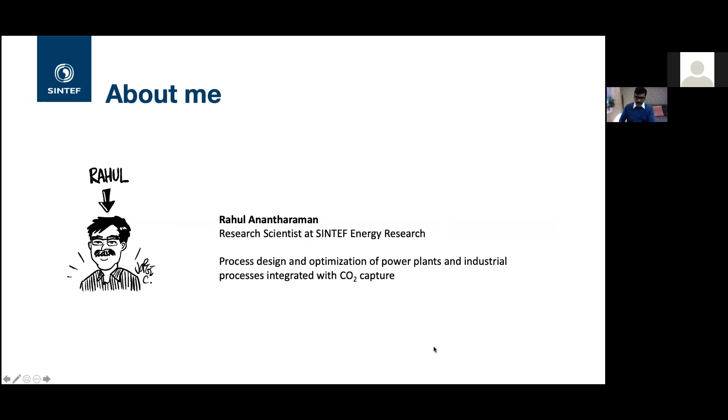I'm Rahul Anantharaman. As I said, I'm from SINTEF Energy Research, and for the 1 hour today, it is a very broad topic that we have. So I'm going to start off by presenting my organization to you. I'm not sure if you know that. So just a very quick presentation of the organization where I work at. And then start with where do the CO2 emissions we are talking about come from?

What is the role of CCUS in a net zero scenario? I'm taking the idea of clean energy to mean a net zero scenario. That is, we don't emit any net CO2 as a society, which the energy system is a very big part of, but it is not limited to the energy system itself. Then talk a little bit about CO2 capture,

and give an example of that in hydrogen production, the role of CCS in hydrogen production and the future energy system scenario. What is the role of CO2 utilization, carbon dioxide removal technologies, with a specific mention on waste to energy with CCS, and summarize the talk. So like I mentioned, it's a broad topic, so I've gone very high level with it. So I'm not going into details.

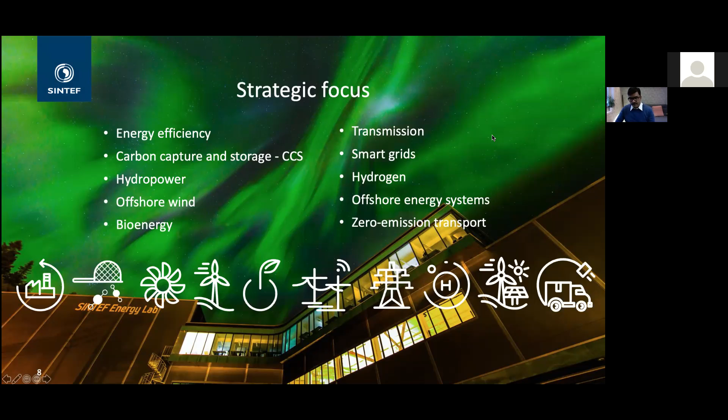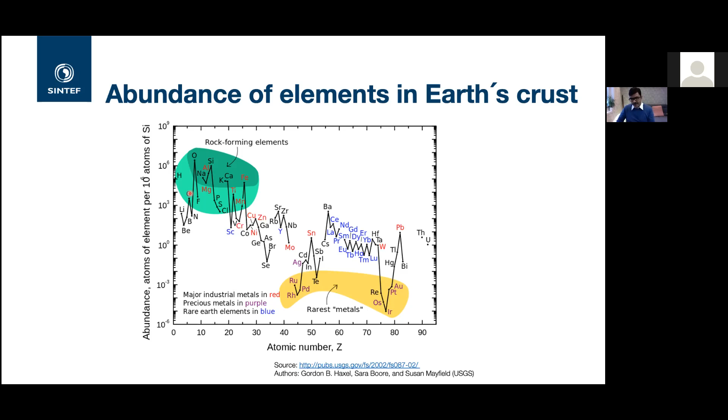But of course, that is not the major one. Where the majority of the CO2 comes from is the use of fuels. And fuels tend to have carbon in them, except hydrogen. Most other fuels or all other fuels have carbon in them, and burning them emits CO2. And that is where most of the CO2 comes from, burning of fuels for energy, either in industry or other residential purposes, or for transportation, etc. And that's where the CO2 comes from.

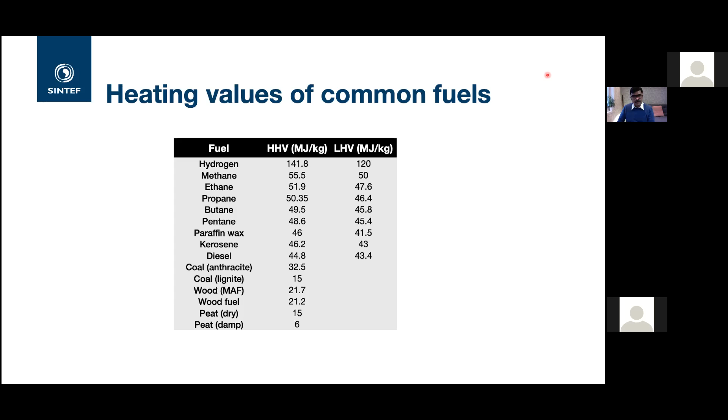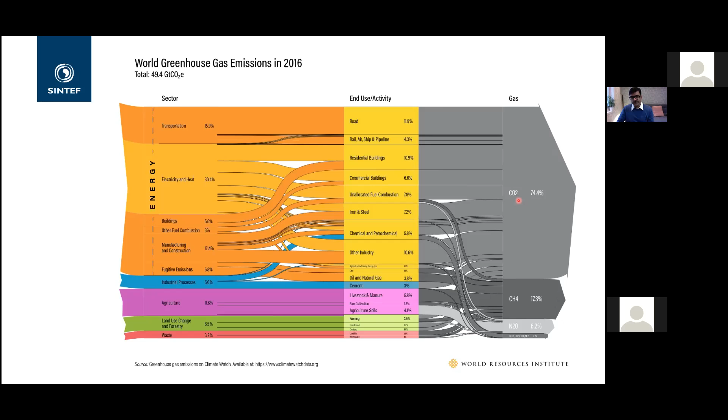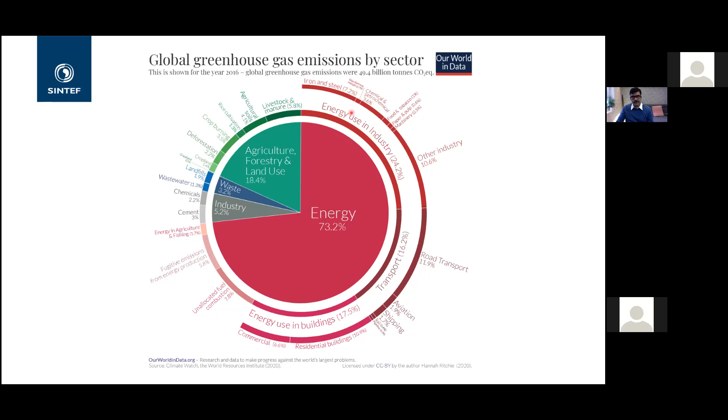The industrial emissions that we talk about, like I said, for cement is approximately only 3%, even though there is also a fuel use in the cement industry, which comes as part of this here. So, to summarize, we could say that CO2 emissions from energy use is primarily from the carbon in the fuel. And there is also other amounts of CO2 emissions as a byproduct of chemical reactions needed in the production process.

The most simple example is clinker production, but both ferrous and non-ferrous metal productions use carbon as a reducing agent. And when you use carbon as a reducing agent to produce the metal, you end up releasing the carbon as CO2. And that is a source of a lot of CO2 emissions, particularly in iron and steel. And here in Norway, we have a lot of non-ferrous metal production like manganese and silicon, and also aluminum, actually. There is a lot of CO2 emissions that are associated with that because of the use of carbon as a reducing agent.

And of course, there is the case of hydrogen, ammonia, or methanol, where you convert your natural gas to hydrogen and CO2, and then separate out the CO2. So these are all the sources of CO2 which are not directly from using a fuel, but through production processes for metals and other items that we use every day.

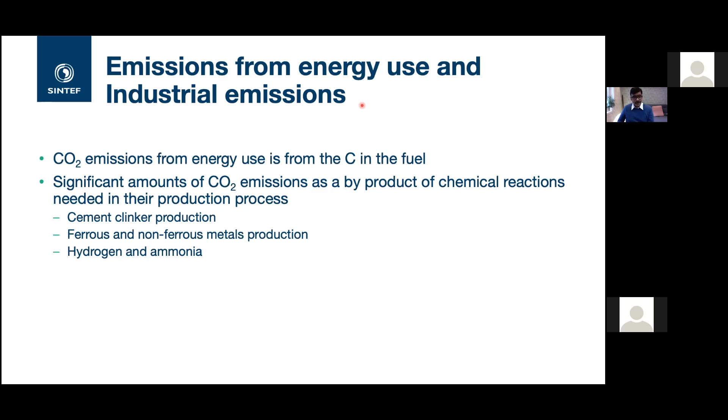So I'll directly jump into the topic and present what is the role of CCUS in a net zero scenario, and then talk a little bit more about the details, because the idea is to present what it means first. So there have been many studies looking at energy systems. So you do energy systems modeling, either country-wise, region-wise, or even continent-wise. We do quite a lot of studies in Europe.

And the output from these models depends quite a bit on the inputs you provide to it, as with everything. But the problem is these are such high-level models that you tend to provide very simplified assumptions to them. And there are a lot of biases when you do this modeling, depending on who's doing the modeling. So an example is, if you go to the website shown here, they have a collection of 56 peer-reviewed papers, which tend to show that you can have a clean energy system which is 100% renewables.

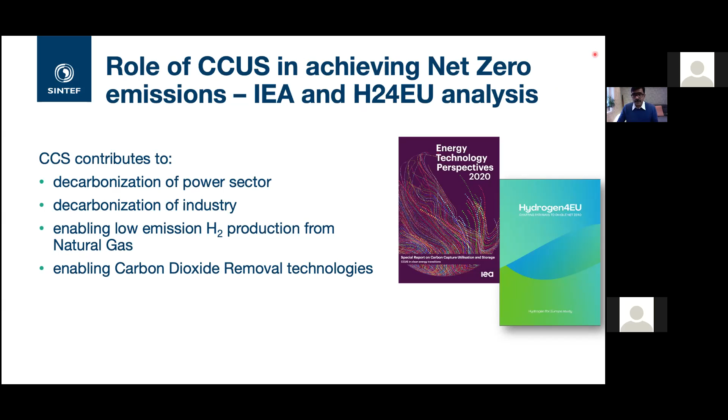I don't see I have any questions so far. Please let me know in case you have any questions and want to ask me to stop.

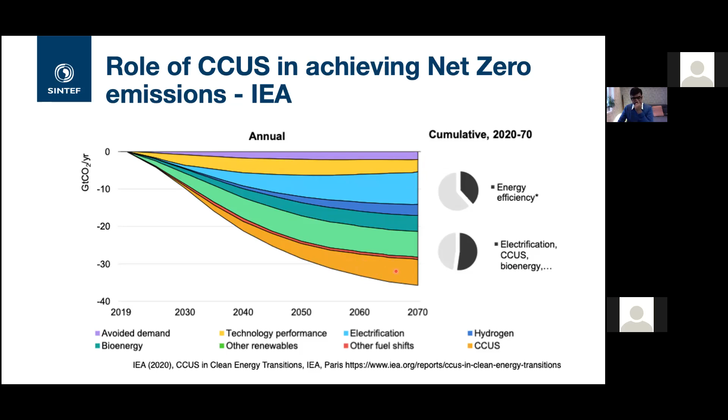So according to the IEA, I'll focus on the IEA report because it is a much more renowned organization and everyone knows about it and tends to follow what they say. So according to the IEA report, CCUS has a significant role to play, as you can see in the cumulative amount of CO2 emissions that are reduced by CCUS. And most of this, you see, comes from capture from coal, which they see increasing in 2050 and then reducing by 2070, but also natural gas.

And this increase in natural gas is both power plants and natural gas conversion to hydrogen. And there is significant CO2 being captured from biomass combustion. And again, most of this is biomass combustion to produce electricity.

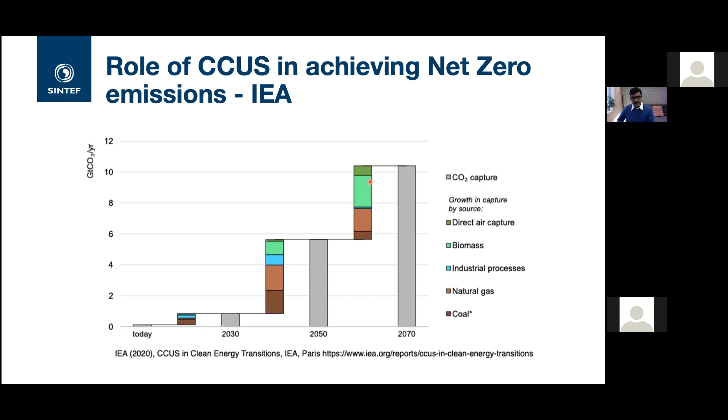Initially, by the year 2050, there will be a lot more CO2 captured from industry according to their analysis, after which time they see it being electrified, so less CO2 emissions from fuels from the industry, so less capture required from the industry. But then you have a little bit starting in 2050, but quite a bit of it in 2070: you capture CO2 directly from the air, or you remove CO2 from the air. And that, again, I'll talk a little bit about later in this talk. So we've seen that CCUS has a role to play.

So let me give you a very quick overview of what CCS is. So basically CCS is the fact that you have CO2 in a source and what you're trying to do is to remove the CO2 from the source. So you're capturing that CO2. When you use fuels, the CO2 comes from burning the fuels. So in the case of power plants or combustion processes, there are three main routes to capture your CO2.

The first, most common route is called post-combustion or end-of-pipe capture, where you have your fuel combustion or chemical process conversion, as the case may be, and you get a stream primarily of CO2 and nitrogen, which you then separate out. And this CO2 then goes to CO2 compression or liquefaction, depending on the transport that you're using, and then goes to storage or utilization. And the main separation here is between nitrogen and carbon dioxide. And the most mature technology is absorption using amine-based solvents, and this is applicable to both new and existing plants.

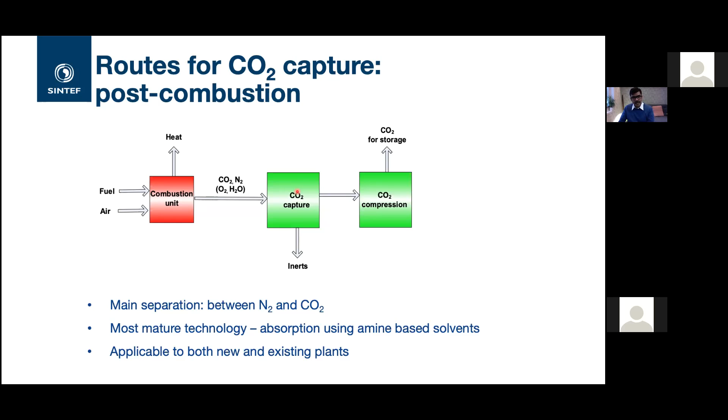And this is the most common form of CO2 capture that we talk about. So typically industry uses this, power plants tend to use this. So this is the most common form. When we say CO2 capture, this is what we think of.

Another route is oxy-fuel combustion. Here, rather than burning the fuel in air, which is where the nitrogen comes from, you burn it in oxygen so that you get rid of the nitrogen. And then theoretically, you will only have CO2 and water as products from your combustion, because the C and H in the fuel will combine to form CO2 and H2O. So then it is easy to separate out, just condense out the water and you get the CO2 in theory. But that is not the case. So the process is a bit more complicated.

Why? Firstly, burning something in pure oxygen is very difficult. It results in very high temperature. So what you need to do is recycle some of your CO2, or quite a lot of it, back as a sort of temperature control.

This reduces NOx formation, etc. Also, you don't get 100% pure oxygen, so what you end up having is a little bit of nitrogen, a little bit of argon, etc.

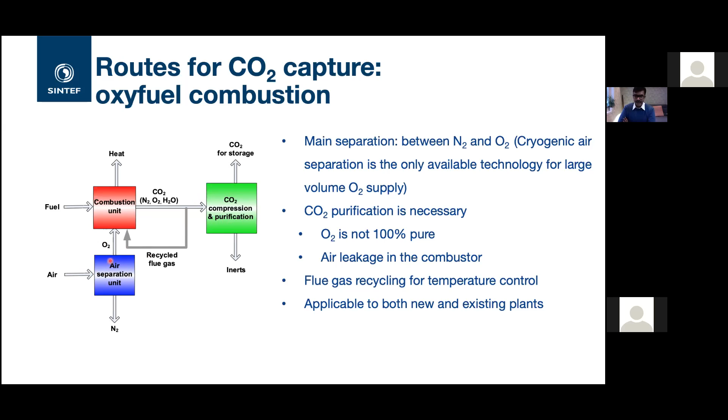The last route we can talk about is pre-combustion. As the name suggests, what we are doing is capturing the CO2 before you combust it. And how do we do that? Either the fuel, natural gas or coal or whatever the fuel is, or biomass.

You can either gasify it or reform it and convert it to syngas, which is a combination of CO, CO2, and hydrogen. To ensure you separate all of the CO2, you go through a water gas shift, where most of the CO is then converted to CO2, and you end up having mainly CO2 and hydrogen.

Here you capture the CO2, and then you burn the hydrogen, either in a furnace or whatever the application is, even in a gas turbine. So this is where you are actually capturing the CO2 before the combustion process. So it's called pre-combustion.

So here the main separation happens between CO2 and H2. There is also the air separation that takes place, but it's a small part compared to the larger part, which is the CO2 hydrogen separation.

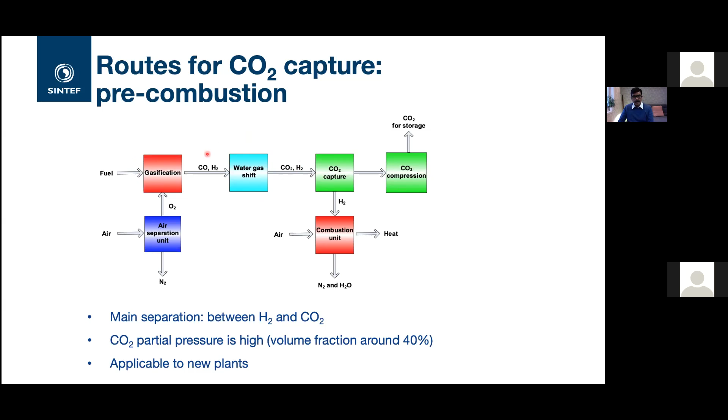So we've been talking about these separation techniques. So what do we use for CO2 separation? The most common one is sorption-based separation. It can either be absorption, with a B as in boy, or adsorption, with a D as in dad.

In the case of absorption, what you have is a liquid that flows typically countercurrent to your gas containing the CO2 that you want to remove. They are contacted with each other in a unit, and CO2 is captured.

This solvent which captures the CO2, your absorbent here with a B, then goes to a regeneration unit. The regeneration unit is where you supply energy, so that you separate your CO2 from your solvent. Then the solvent is regenerated, CO2 separated, and you send your solvent back. This is an absorption process.

In the case of adsorption with a D, as in dad, here what you do is you have solid particles rather than liquid, and it's typically a surface phenomenon. It's not only physical adsorption, but sometimes also chemical adsorption, but it can be either of them, and follows a similar process.

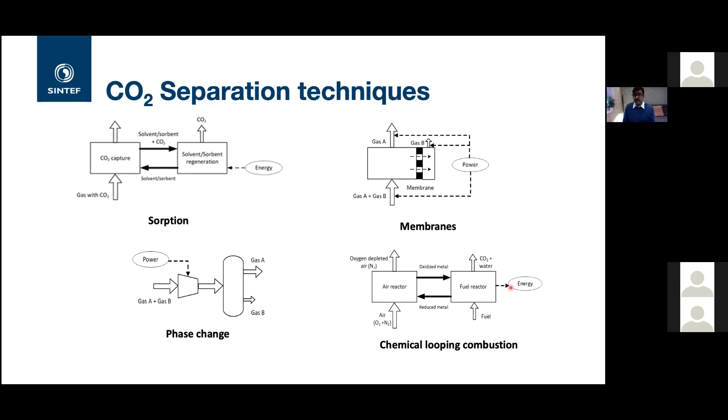So I'm giving you an overview. I could spend - I've taught courses on these capture technologies for a couple of days - so we won't go into the details here, but in case you want to know anything in detail about these capture technologies, please let me know. So I talked about the different capture technologies, but they are at different stages of development.

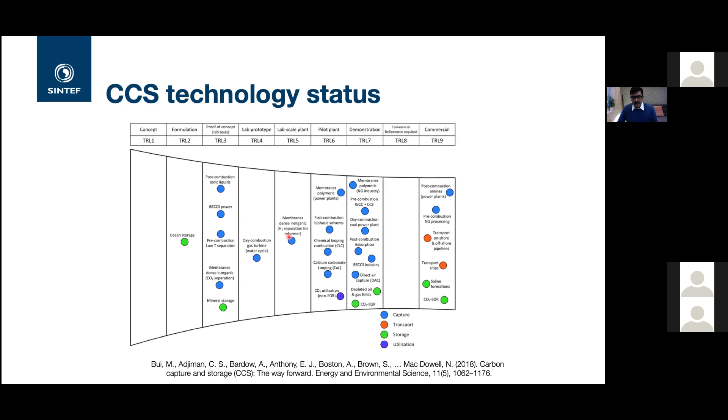So how will you select a capture technology?

Of course, it depends on the CO2 partial pressure. What do I mean by that? It's a combination of the CO2 concentration in the flue gas and the pressure at which it is available. For instance, the cement industry has approximately 20% CO2 available at 1 bar.

So the partial pressure is 0.2 bar, because 0.2 multiplied by 1 equals 0.2. In the case of hydrogen production from natural gas, the syngas is at say 20 bar, with approximately 30-40% CO2. So that's 0.4 times 20, which is 8.

So there are large differences in the partial pressure. Higher the partial pressure, easier it is to separate, and you use options which are pressure based, or even liquefaction. At lower partial pressures, you would use absorption or temperature swing, because it has to react to separate rather than use pressure as a driving force.

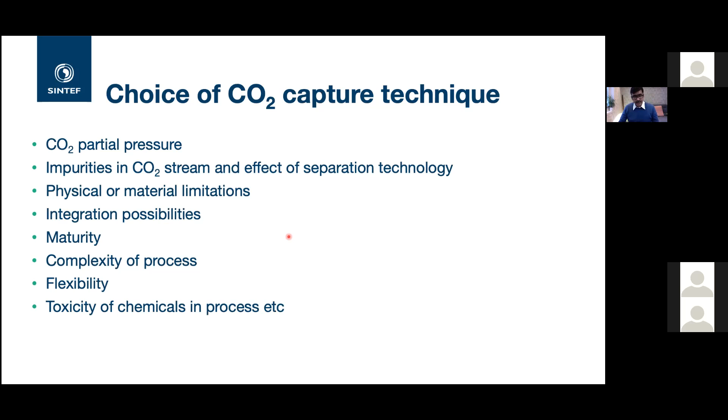Aluminium production has really low CO2 concentration because the CO2 comes from an electrolytic process where Al2O3, or bauxite, is reduced to aluminium using a carbon anode. This process generates so much heat that they use air to drive out and cool the CO2, so it's diluted by air to approximately 1% CO2 at atmospheric conditions, making it very difficult to capture.

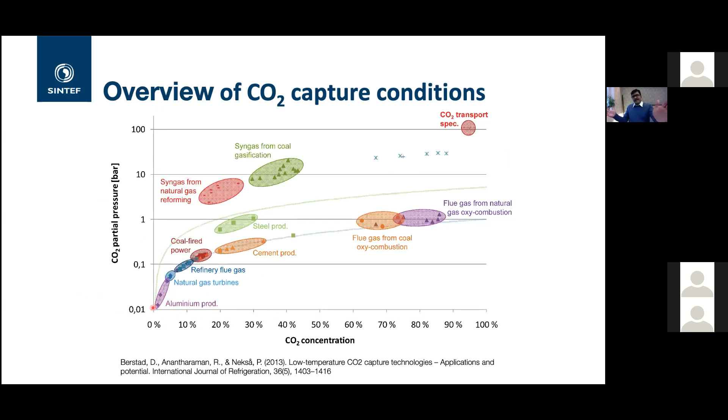Of course, there is no getting away from it - we still need to capture CO2 from a natural gas combined cycle power plant, so we need to still develop technologies there. But we must keep in mind that this is going to be way more expensive.

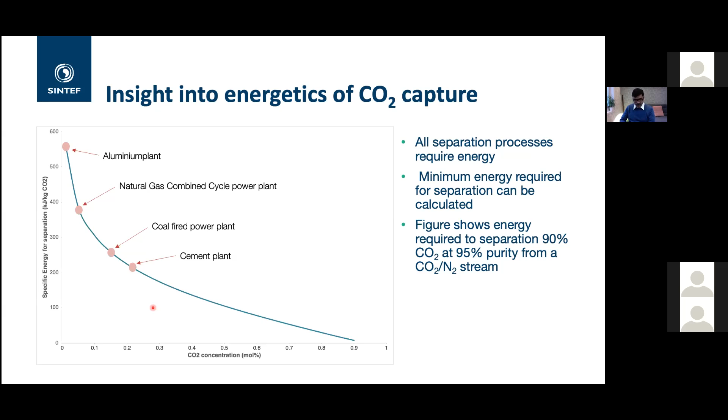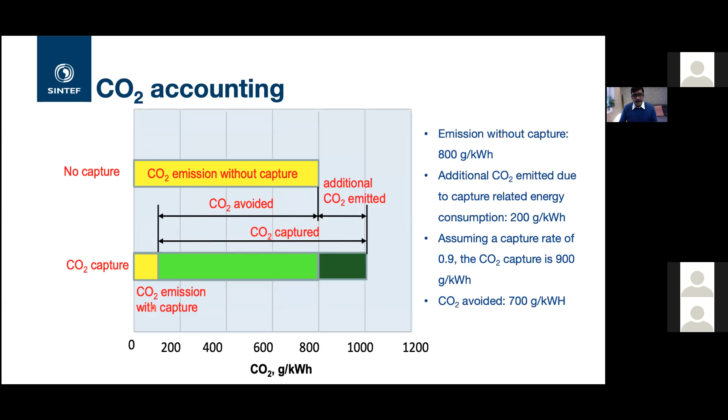I noticed that I have talked quite a bit and I'm way behind on my schedule.

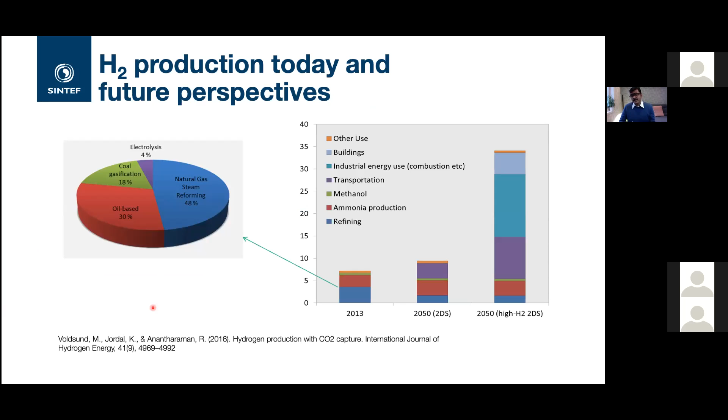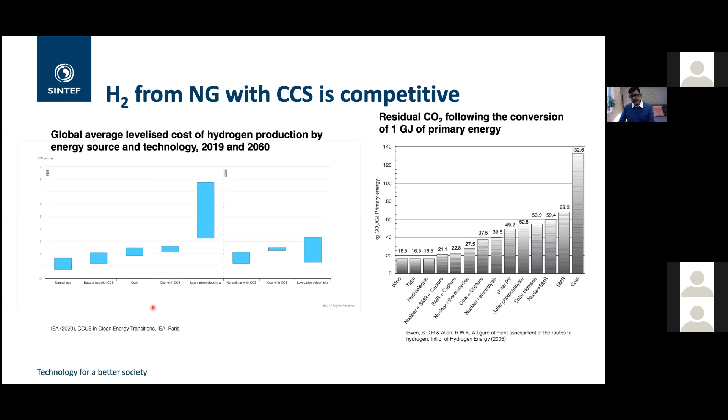So what I'll do is I'll skip through the hydrogen as a clean energy vector. Suffice to say that hydrogen is very important in the future as we see it. As the world is seeing it now, we are going through a hydrogen boom - everyone is talking about hydrogen. And hydrogen from natural gas with CCS is the best way to provide hydrogen as we know it today. Even the cost seems to show that that is the best way forward.

So there is also the topic of CO2 utilization, because the topic said CCUS. We ourselves don't work quite a bit in utilization - we focus primarily on capture and storage because that's the best way to get rid of the CO2. But there is a value for utilization, a small value, and there are three different routes to do this.

Overall, first is mineral carbonation, where the CO2 can be reacted with minerals or waste streams. So it can be rocks, mineral rocks, or waste such as iron slag, or even waste-to-energy plants have fly ash that can be used to actually react with the CO2 to form carbonates. And these carbonates can be used in the construction industry and for long-term storage. So there is a value for it. It doesn't pay much, but it is very easy to do, low energy requirement.

Next in energy requirement is conversion. So this goes along with this whole circular economy, where you capture your CO2 and then you convert it back into useful chemicals, like polymers that are used in a wide variety of industry. The idea is that you're now replacing fossil carbon and rather using carbon that you have captured instead. But the energy requirement depends on the process pathway and the particular chemical that you're looking to convert to.

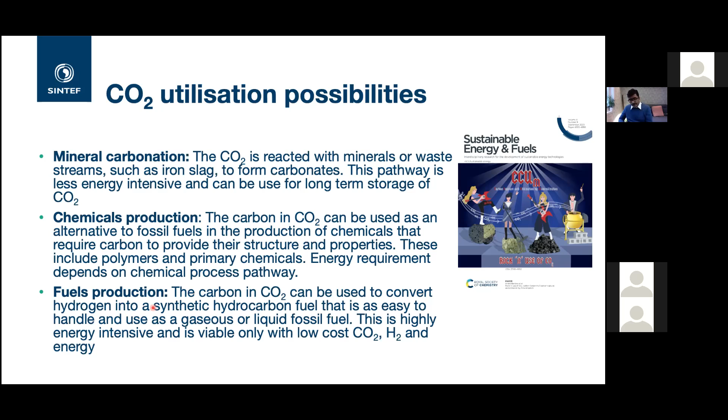The most energy intensive of these is fuel production. There has been lots of talk about capturing CO2 from the air and also producing hydrogen from renewables, combining these to produce fuels, either methane again or methanol, etc. But this is not a viable option unless you get really low-cost CO2, hydrogen, and energy. Basically, most of these cases assume free energy and very cheap CO2 and hydrogen, which is typically not the case.

So we've done a study, again, back to cement. We've done a study for the cement case a few years ago as part of a project that we were leading. And one thing is very clear, and this has come up again and again from everyone who does these studies: you must look at it from the overall lifetime perspective.

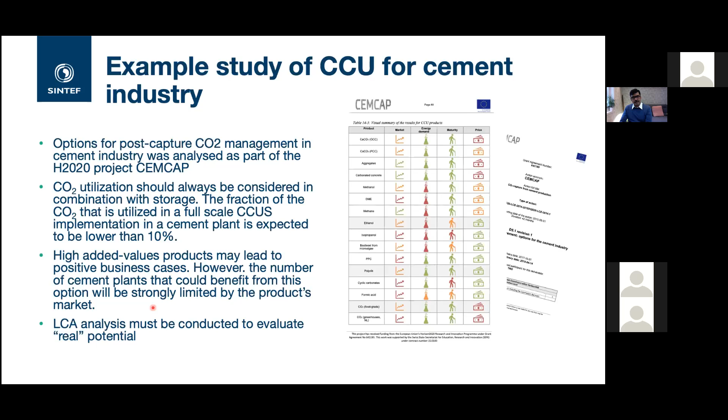Only a small fraction of it can actually be used because the market is so small. So you can only use a small fraction of your emissions in utilization. But this small fraction that is used can help to provide income for the company to do the capture. But you must do a full LCA analysis to evaluate the actual amount of CO2 that you store or is removed from the environment. And these are a list of things to consider when you look at utilization.

I'll very quickly touch on the role of carbon dioxide removal technologies. We want to get to a carbon neutral world, or net zero emissions. This green area indicates all the other conventional technologies that we're using, renewables, CO2 capture, et cetera, and we can get down the emissions to a certain amount. But there will still be emissions from other sources like cars or some kind of vehicles, transport, and these are very difficult-to-abate emissions which we cannot capture the CO2 from.

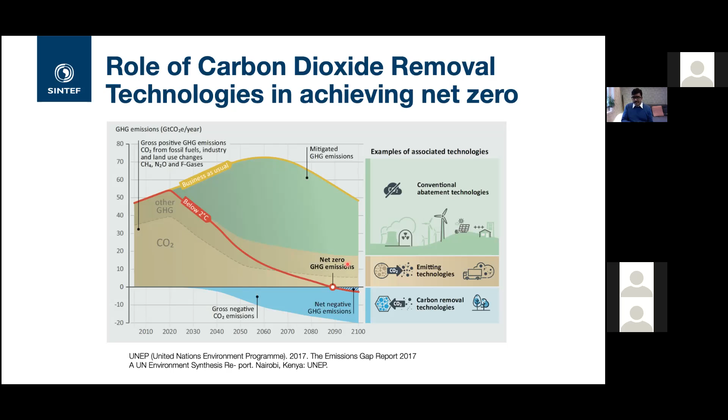So what do we need to do there? What we need to do is to then remove CO2 from the atmosphere, and that way we can offset the emissions in these cases that we cannot remove the CO2 from. So CCS has a very important role to play there.

Or you can use what is called direct air capture. There is 400 ppm of CO2 in the air, and people have been looking at capturing the CO2 directly from the air. This is very, very expensive, and like I showed in the curve, the lower the concentration, the more energy it takes to capture the CO2. So this is going to be very expensive, but it is a process that we may need eventually because we don't capture enough CO2 with the existing processes today.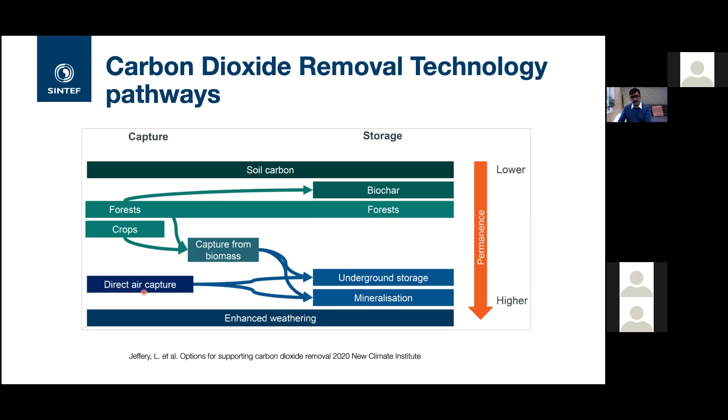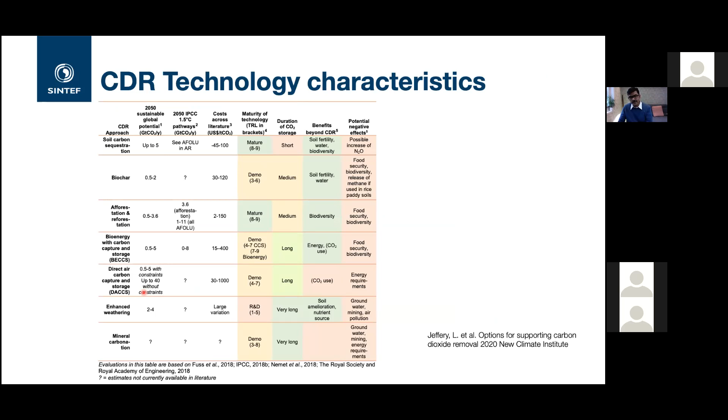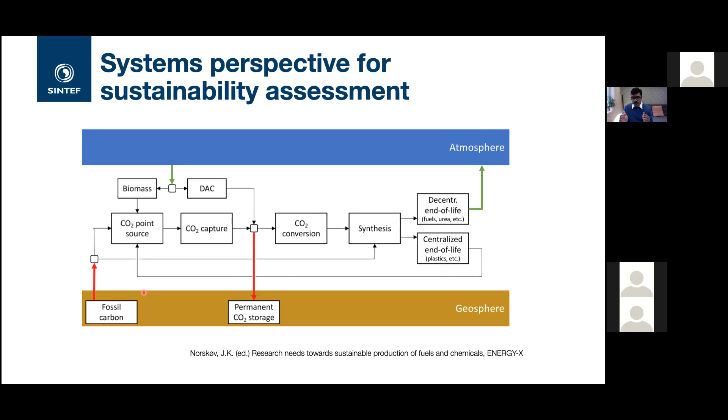And this gives an overview of the costs of the different options, and you see that CCS is an important tool here to remove CO2 from the air and achieve net zero and a clean energy system. So whatever we do, whether it is utilization, storage, or capture from the air, we need a systems-level perspective, an LCA analysis, to make sure that you account for CO2 the right way. All CO2 is accounted for, the energy required in conversion and things of that sort, to make sure that you do remove net CO2 from the environment.

So I'll very briefly talk about an important point, which, particularly in the countries that you're all representing, is the role of waste to energy plants with CCS. So what is CCS? Basically, you have fossil fuels, you burn it, either in an industrial process or whatever, you have a product, but then you have CO2 emissions, which you then capture most of and put underground, or utilize if you want, but there is some emitted to the atmosphere.

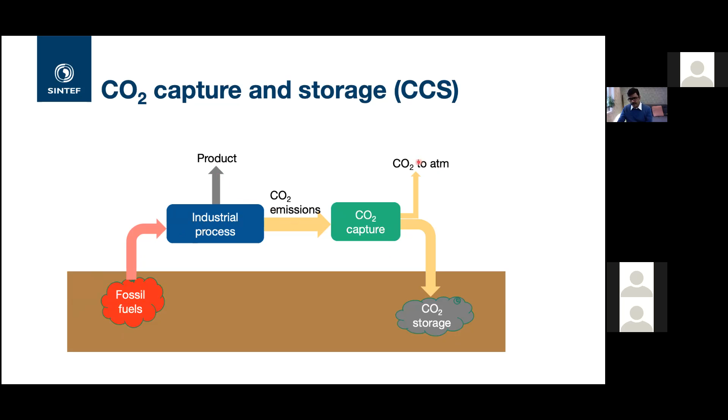BECCS, that I talked about earlier, which is bioenergy with CCS. What do you do there? As I said, you have trees which take the CO2 from the air and then you burn it or do biomass conversion either to electricity or biofuels. When you use biofuels, you release CO2 to the atmosphere, unfortunately, but there are other CO2 emissions from the conversion process, which are captured and stored. So here you are going from CO2 from the air to CO2 storage. So you're net removing CO2 from the air.

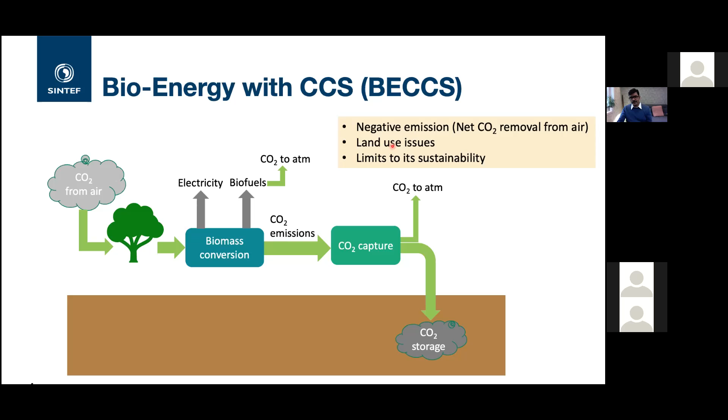However, with anything related to bioenergy, there are land use issues and there are limits to its sustainability. So this is where municipal solid waste comes in. Municipal solid waste has plant-based products like food, but also products from fossil fuels. Now, what is happening in many of the countries is that quite a lot of it goes to landfill, where you have methane emissions. Like I said, methane is a 28 times more potent greenhouse gas than CO2. So 1 kilogram of methane is equivalent to 28 kilograms of CO2. So in landfills, you're emitting a lot of methane.

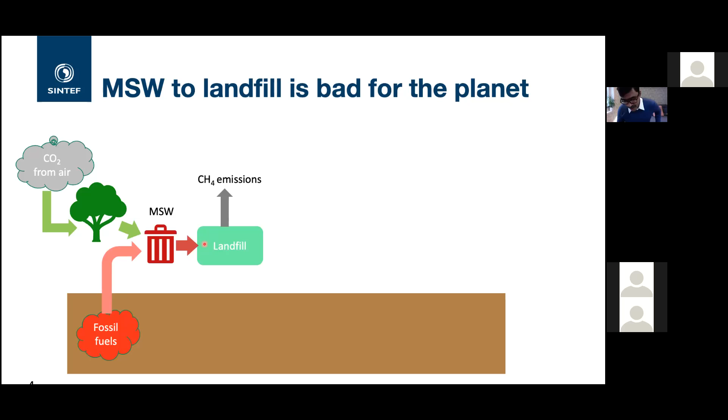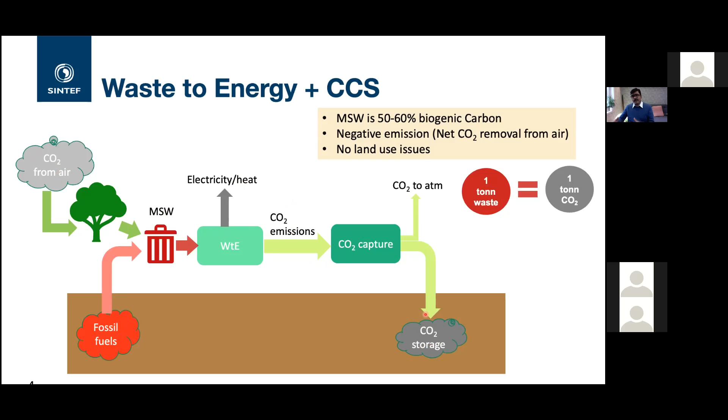So what is a better way to do this? A better way to deal with it is to take the municipal solid waste, which contains approximately 50 to 60% bio-based products. Then you burn it or incinerate it, you generate heat and electricity, you have the CO2 emissions which you capture and store, and 1 ton of waste approximately gives 1 ton of CO2, which you capture 95%, so it's a very small amount of CO2 that you're emitting. And here you are eventually removing CO2 from air. And there are no land issues. The waste keeps on increasing. So what we're trying to do is to capture the waste as much as possible.

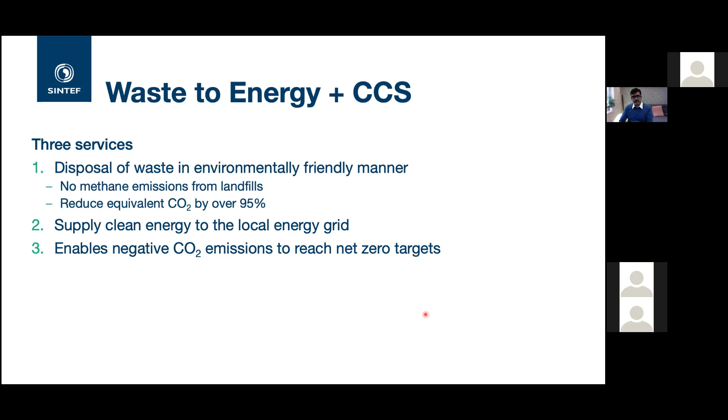And by doing this, you're doing 3 services. One is you are disposing waste in an environmentally friendly manner. You're reducing CO2 equivalent by 95%. You're supplying clean energy to the local energy grid. And it enables negative emissions to reach net zero targets. Typically in cities, where most of the waste is emitted, where you have cars where you don't capture your CO2, you can capture CO2 from waste to energy plants.

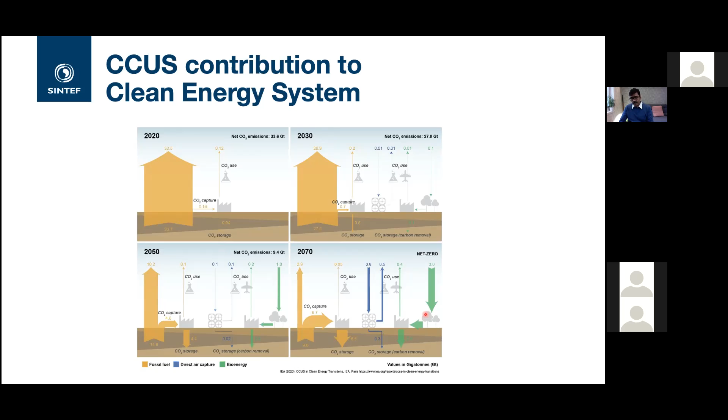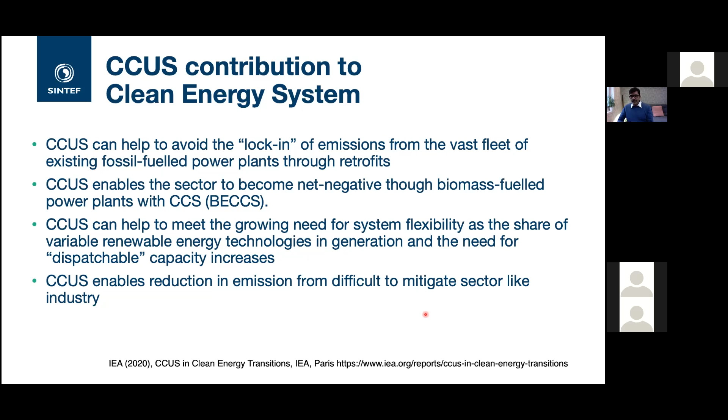So to summarize, CCS has a role to play, utilization a much smaller role, but CO2 capture and storage is a very important part of it. And what kind of role? It avoids locking in emissions from existing fossil power plants. You can retrofit them with CO2 capture. You can get net negative by using BECCS, or bioenergy with CCS. And in renewable energy systems with a lot of fluctuations in solar and wind power, you can use NGCC, natural gas combined cycle with CO2 capture. So CCS has an important role to play, and I've given you a brief. I'm sorry for rushing through the last part of my presentation, but hopefully you'll be able to take some understanding of the system as such.

I don't know if there is time for any questions or if anyone has any questions, so please feel free. It is relatively quiet here.